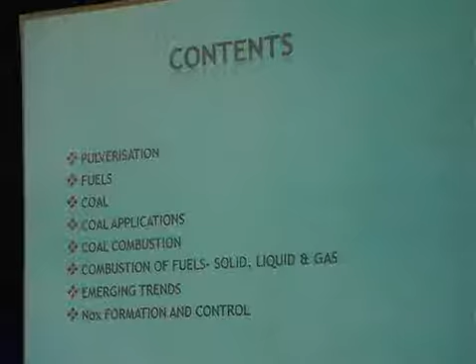We'll see what pulverization is. Pulverization means making any big particle into a fine particle. How will better combustion take place? Combustion will always take place, even with a bigger particle. It doesn't mean that a bigger particle will not take part in combustion. It takes place, but what happens? Area of contact. Area of contact of what? Fuel. Only the fuel we are making into fine particles. With what will it contact?

Oxygen. That is important. So when you make finer and finer particles, the particle size will become smaller and smaller, so higher combustion efficiency. That results in overall thermal plant efficiency. So pulverization is the first and foremost process which increases the efficiency of thermal power. Then how spontaneous combustion takes place: when a bigger particle is there, it cannot burn automatically, but a finer particle can ignite automatically. So that also leads to spontaneous combustion.

So all these advantages we have seen of pulverized coal. But is there any drawback of pulverized coal or pulverization? Because when it is made into finer and finer particles, what happens? Have you heard about nanotechnology, nanoparticles, carbon nanotubes, all these things? What happened?

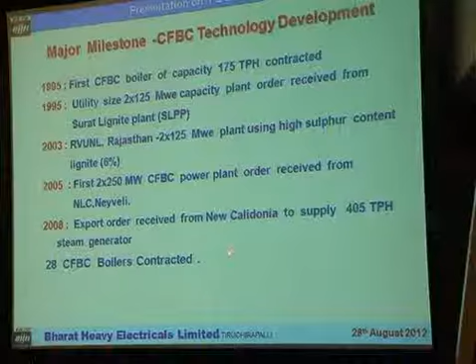Volatile matter is there. For foreign countries, in Indonesia and New Caledonia, that is near Australia, we are supplying 125 megawatt CFBC boilers, 2 numbers, under erection. We just contracted 28 CFBC boilers.

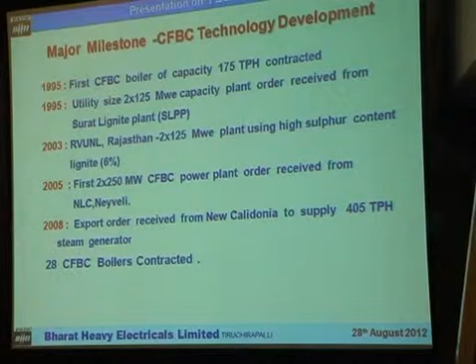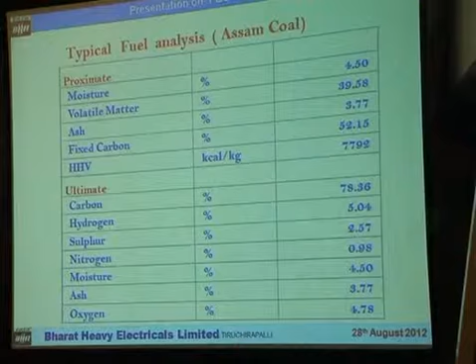This is a typical fuel analysis. My friend explained well what that is, so I don't need to go into this. This is a limestone analysis, how it looks. If you see the limestone analysis, calcium oxide is 53.7, carbon dioxide is 37. That is the typical analysis I have given you. About 90% is calcium carbonate. The rest is silica, aluminum, and so on. This is what is used for sulfur dioxide absorption.

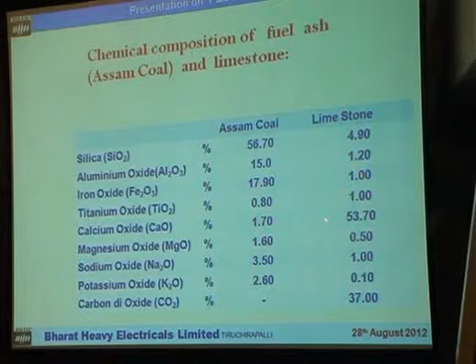One of the largest boilers in operation is a 460 megawatt CFBC boiler in Poland. It is supplied by Foster Wheeler and it is in operation. The boiler height is about 48 meters. 48 meters, you can just think of it. Width is about 27.6 meters and depth is about 10.6 meters.

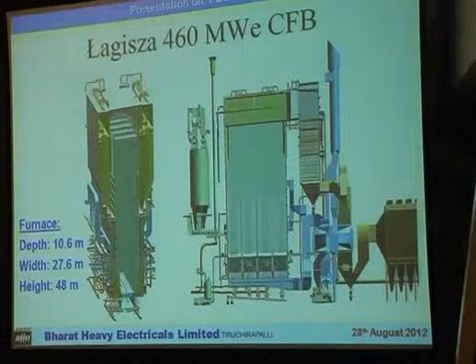It's got 2 sides with rectangular cyclones. This is the combustor. Particles are going to this side as well as this side, collected here and then recycled back. This is the combustor, this is the back pass, this is a tubular air heater, this is an electrostatic precipitator. This is in operation, and they have very stringent environmental goals. Very stringent. The next slide.

Yes, show the values. They are in European countries. They mention the level of SO2 emission, NOx emission, CO, and particulate emission. It is monitored on a daily basis. The Pollution Control Board insists on all those things. Typically, so many milligrams per normal cubic meter is allowed for sulfur dioxide, and NOx in the form of nitrogen dioxide, only so many milligrams. They insist on it. They stick to it.

It's not numbers given for publicity. This is big practice now in the country. They are using very inferior varieties of coal, but in spite of it, they maintain this. They use local bituminous coals, coal slurry, and biomass also, about 2 to 3% biomass. This is steam data.

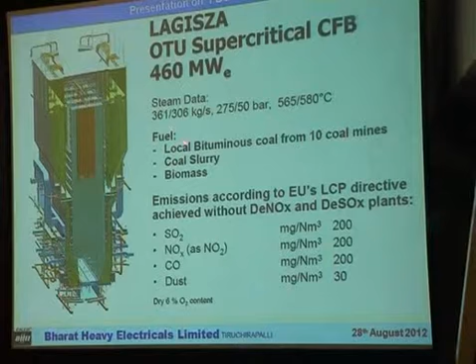In spite of it, they have done a lot of laboratory work, modeling work, CFD analysis, all those things. Based on this, they designed the boiler and constructed it. Right now they are doing the commissioning part.

They have as many as 30 numbers of 300 megawatt boilers in operation in China. 30 numbers. In India, we don't have even one single 300 megawatt boiler. We are right now doing a 250 megawatt, and only now we are commissioning it. So 30 numbers are already in operation there. They are in a well advanced state now. Worldwide also, they are the first ones to install a 600 megawatt boiler.